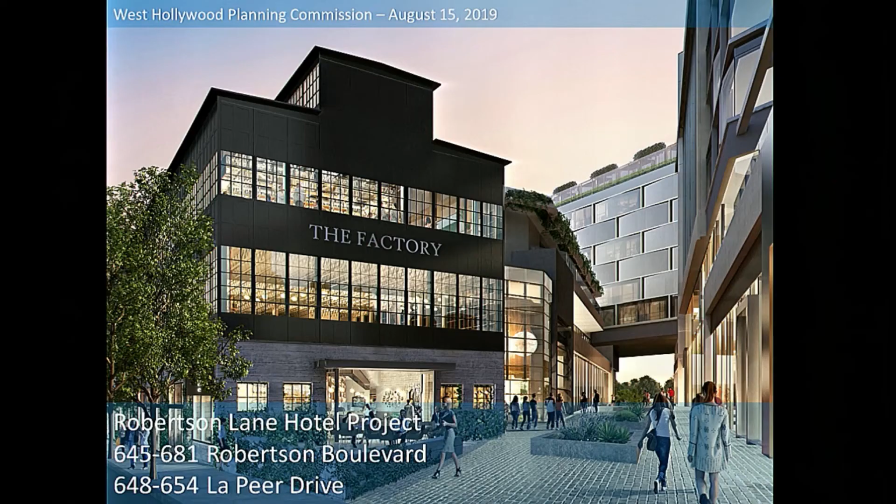Thank you. Good evening, commissioners and Chair Jones. Thank you for the kind words, appreciate it. This item, as you mentioned, is a request for changes to an approved project located at 645 Robertson Boulevard and 645 to 681 Robertson Boulevard and 648 to 654 La Peer Drive.

It's known as the Robertson Lane Project. The project was approved in June of last year, and it generally consisted of about 258,042 square feet of development overall, 241 hotel rooms, retail, restaurant, and design showroom areas associated with the hotel development, about 10,000 square feet of ballroom and meeting space broken up into 2 main meeting spaces and pre-function areas, a 2,500 square foot nightclub, and a maximum height of 9 stories and 113 feet for the tallest portions of the building.

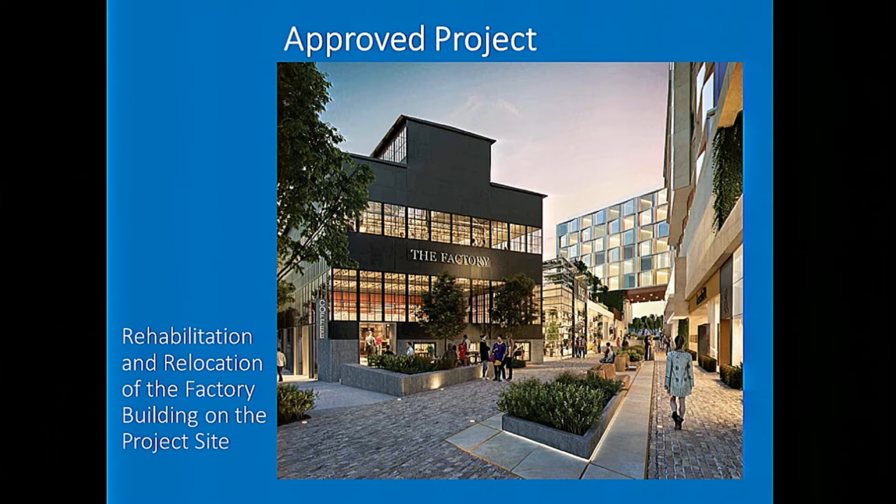Notably, the project also included the relocation and rehabilitation of portions of the factory building, which is a historic building located on the site. It's currently located spanning between Robertson and La Peer Drive, and it will be relocated along Robertson Boulevard. And finally, the approved project includes a pedestrian paseo through the project from Robertson to La Peer, known as the Robertson Lane.

Earlier this year, the applicant approached the city with some changes to the project. These generally included 4 fewer guest rooms, so now we're going down to 237. Slight reductions in overall square footage, the details of which are in the written staff report. I don't need to go through all the numbers here. Reconfiguration of some of the uses on site, notably the ballroom was moved to the Robertson side.

And the guest rooms that were behind the factory building were moved into the towers, which creates a lot of efficiencies for the guest rooms to all be located together and for the ballroom to be located in a space where it doesn't need as many structural columns and can be a larger, more useful ballroom and meeting space, which is what the city really needs in this area.

There was a substantial area increase in the factory building. Previously there were 7 out of 12 20-foot-long modules of the building being preserved and rehabilitated, now there will be 11 out of the 12, and it will be substantially longer along Robertson Boulevard. There were also revisions to the materials and methods of construction, which I'll get into in detail in a minute, and changes to the La Peer frontage and hotel entry, which I will also get into in detail.

So many of the requested changes, I'm going to start with the ones stemming from one particular change: the removal of 2 buildings on the site that were previously to remain. These were always part of the specific plan area, part of the project site and the FAR calculations and all of that. They were just to remain, and now they're going to remove these buildings.

They were evaluated in the EIR and also in the addendum as to their historical significance and found not to be eligible for listing. This opened up a lot of different opportunities for efficiency on the site. Starting underneath, now this area of the site can be excavated, which allows the subterranean parking areas to be expanded, so fewer levels need to be dug out, and it reduces, not substantially, but reduces the export and excavation out of the site.

In addition, this also means that the driveways can be relocated on the Robertson side to the north and south ends of the property. What this does is add to the pedestrian orientation of that stretch of Robertson, where there's no longer a driveway bisecting the factory building and bisecting the site. Now pedestrians can walk the entire length of the project without encountering vehicle intrusion.

In addition, this led to the ballroom changes. It led to a lot of other reconfigurations within the site that is detailed in the table in the written staff report, where it goes through the different square footages that have changed.

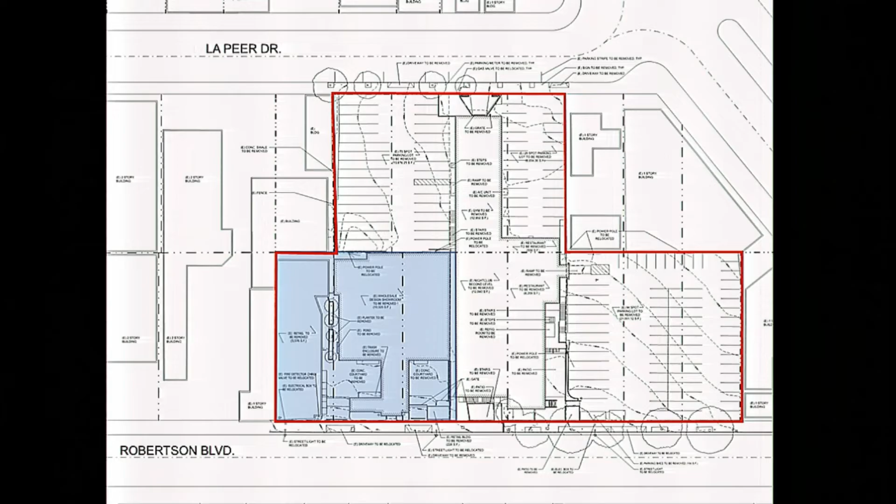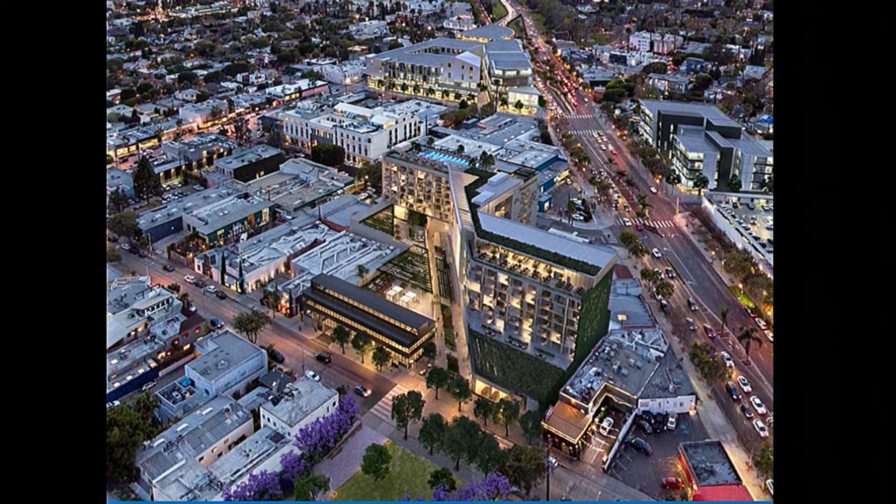So this is an image of the approved project, and you can see where the factory building is along Robertson, and the two white structures to the left of it are the building with the kind of rooftop ductwork. Those are the buildings that will be removed, and this is the new rendering of that same view. You can see that the factory building is substantially larger, and that the site is significantly more efficient. It makes a lot more sense this way.

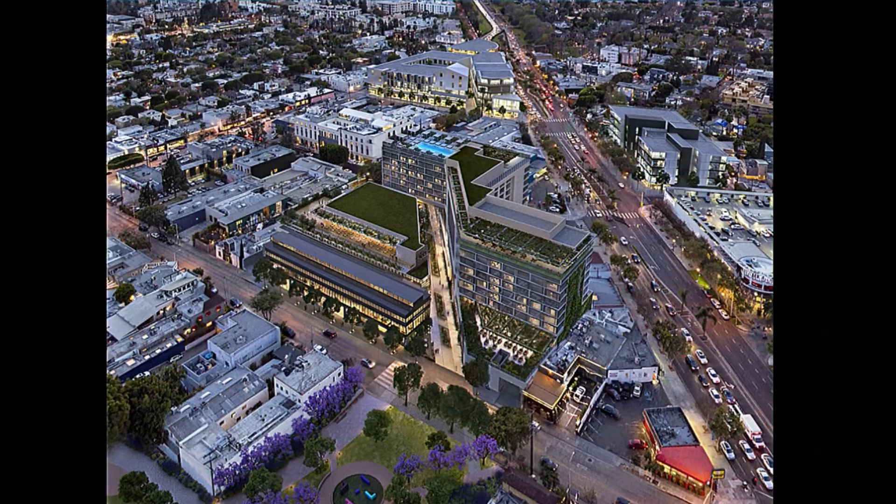So that was... one more view of the factory building and how much it is improved to not have that driveway through it and to be able to have a substantially added length.

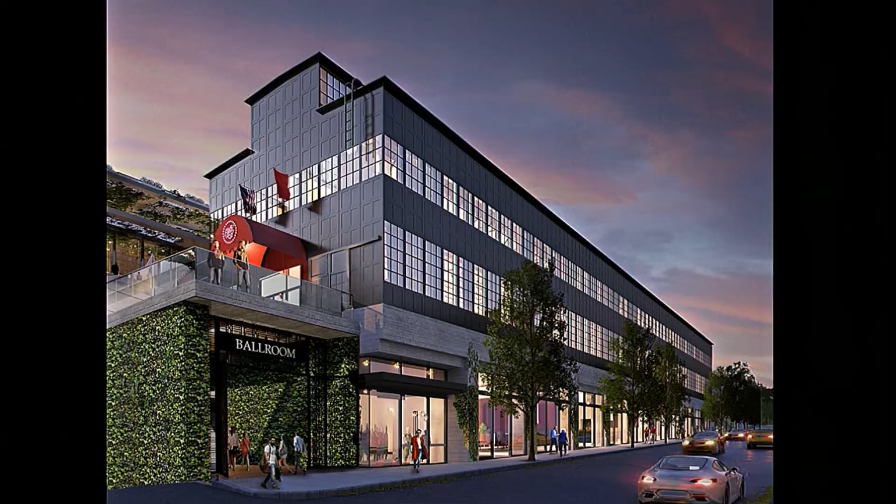So the next major change that was requested had to do with the skin of the building. In 2018, the approved design included a basket weave configuration on the main hotel facade using glass that canted at an angle. So this is in this portion of the hotel area. The materials were bronze anodized aluminum frames and limestone veneer, but a lot of glass.

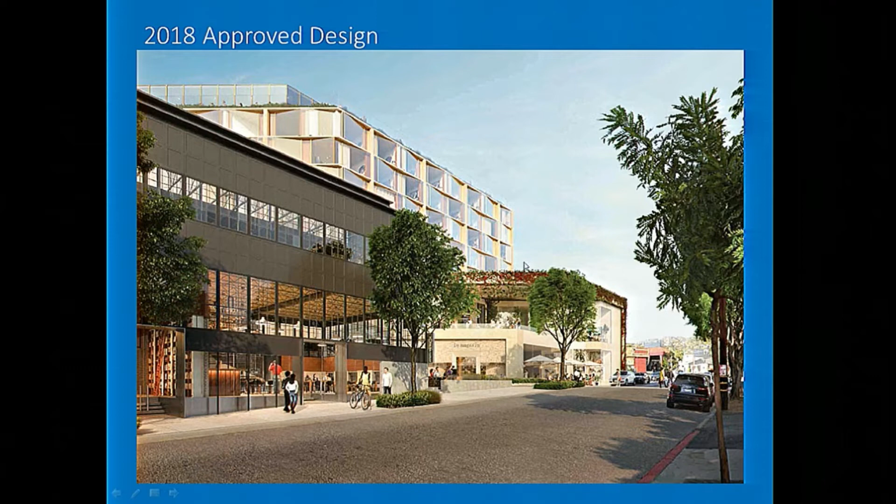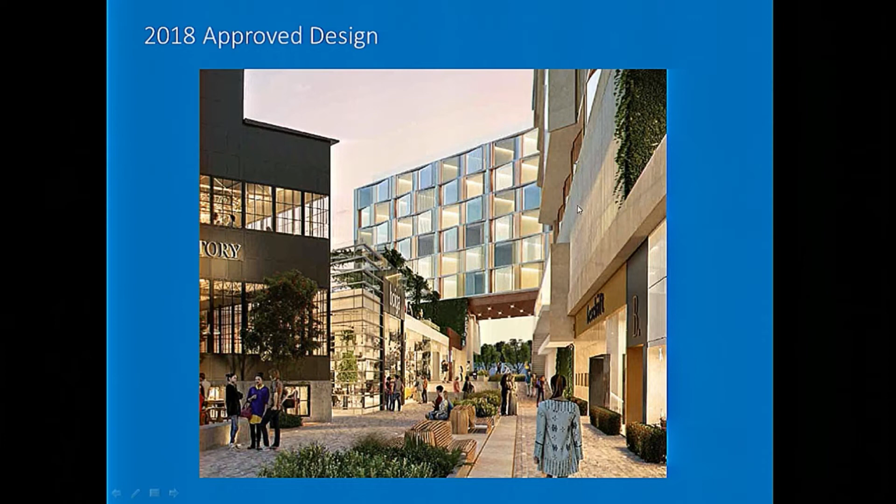And here's another view of the approved design from the lane, and this is the area I'm talking about. This was the concept that they came in with.

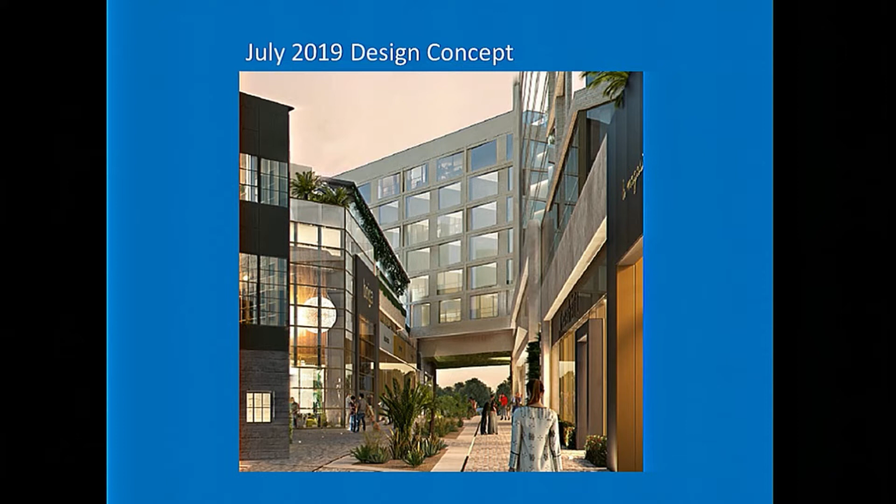Structural engineering issues came up as they got ready for plan check, and structural components needed to be added, so they ended up with a lot more solid space than there was to begin with. They treated that with more of the stone veneer, which is a nice material, but what it did was it ended up flattening the facade and significantly reducing the interest. It was harder to read the basket weave, and it wasn't reading with the same design intent.

As you know, the item was continued from July. One of the comments that came from the Design Review Subcommittee and from staff was that this piece needed to be worked out.

What they did was use that time to explore other design and construction methods, and they were able to come up with a curtain wall system that regains that basket weave approach. It reintroduces the lightness and the elegance to the facade, and really goes back to the original design intent that the skin conveyed originally in the approval.

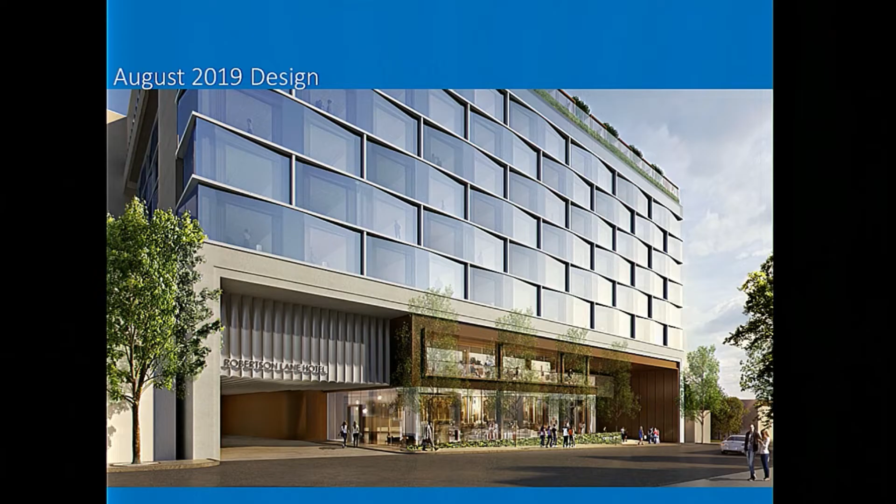So as the project was being engineered again, it became apparent that the span that was originally intended here would require some serious columns that would negate this open space, or substantial structural components across this span, which significantly lowered the height here, and the clear open height made a big difference in the entry to the lane.

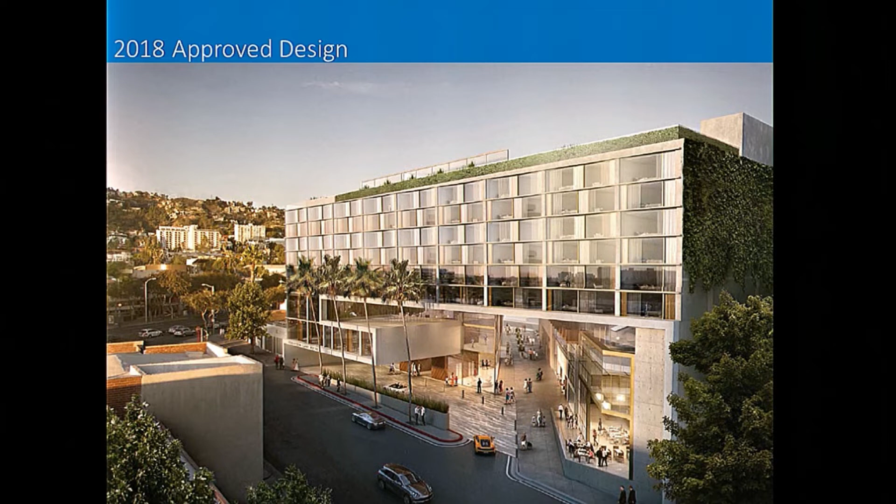This was another issue that Design Review Subcommittee and staff brought forward in the July version that we wanted them to work on. So what they were able to do in that interim was find a compromise position.

They're asking for a modification to the height, so they're asking to add 6 feet 6 inches to the height of that structure, which is within the 10% modification area. It's a 6% modification. That will account for the structural girder that needs to go across, so it's almost identical open height with all the structure and soffits and everything in there. This significantly regains what we needed in that openness here.

Similarly, they've added this piece back in here that's kind of a floating box. It sort of regains some of that design intent with the cantilever in the approved design. I think the biggest thing to say about the change on this side is that it's a lot more pedestrian friendly, because you don't have that vehicle intrusion through the site, you don't have the vehicle drop off here. You've got an entrance to the hotel right off the corner of the lane, an entrance to the lane, and then cars at either end, similar to the Robertson side. So you've got that transparency, and you've got the activity right on La Peer, where we prefer it.

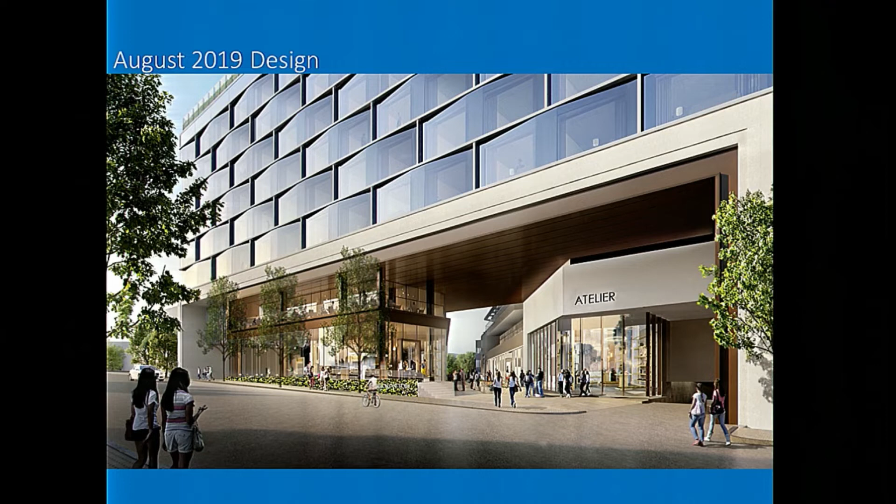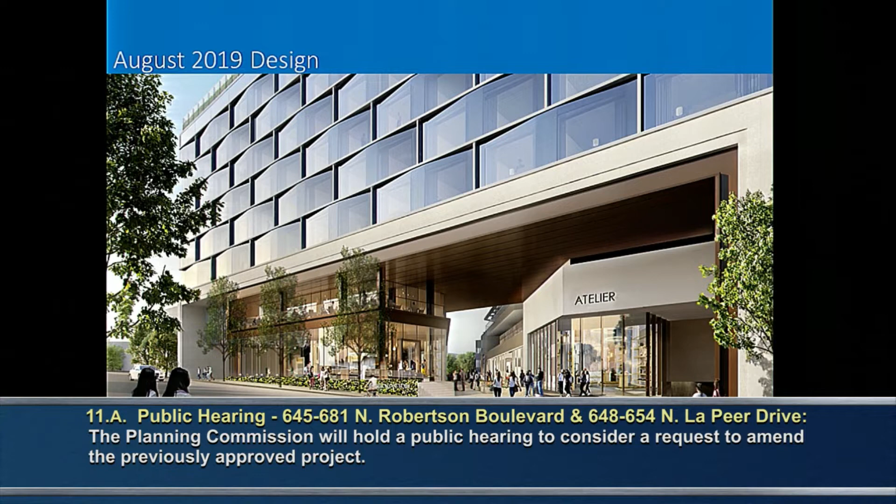I think it's on... no, I see what you're saying. I'm just looking, hang on one second. I will allow the applicant to talk about the logistics of how that circulation will work. As far as the bike racks, it looks like they are on the lane side of a wall there, so they would be separated from the outbound traffic.

I wasn't so much worried about the traffic as the people waiting for their cars and how much space there is for however many people are picking up cars. Given that this is now a 100% valet building, is that correct? I believe so. Okay, whereas the previous iteration it was not? This is something we can look into more. I think it's a good comment, and we'll look into it in the parking operations plan and circulation plan that comes during the plan check phase.

Sorry, I just can't find it right now. Okay, and back to that parking. So it is now 100% valet for 750 spaces. That's what's being proposed, yes. Okay, so do we have a commensurate parking plan as to how that would work?

So the parking operations plan is a condition that they have to prepare later. Okay, because I'm just worried about the logistics of how many people that involves. You've put 700 parking spaces in one level with all of the parking blocked by additional valet. So I'm wondering just how that's physically going to work. Okay.

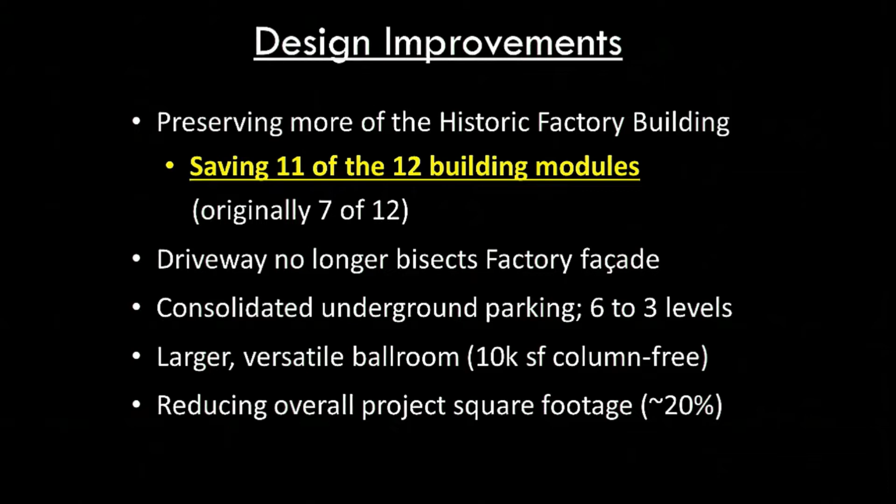As Jennifer explained, with some reorganization on the site, we've been able to improve an outstanding project. Notably, we're extending the restored and rehabilitated factory building to 11 of 12 modules. The driveway has been removed from the Robertson frontage of the factory building. We've consolidated the parking, we have a larger ballroom that will be the trophy for all of West Hollywood events, and we've reduced the overall project square footage. I will introduce the team here that's worked with Craig Hodgetts, our original project architect, and our folks at HKS who have helped us with the construction drawings to lead you through a comparison side by side of the approved and updated designs.

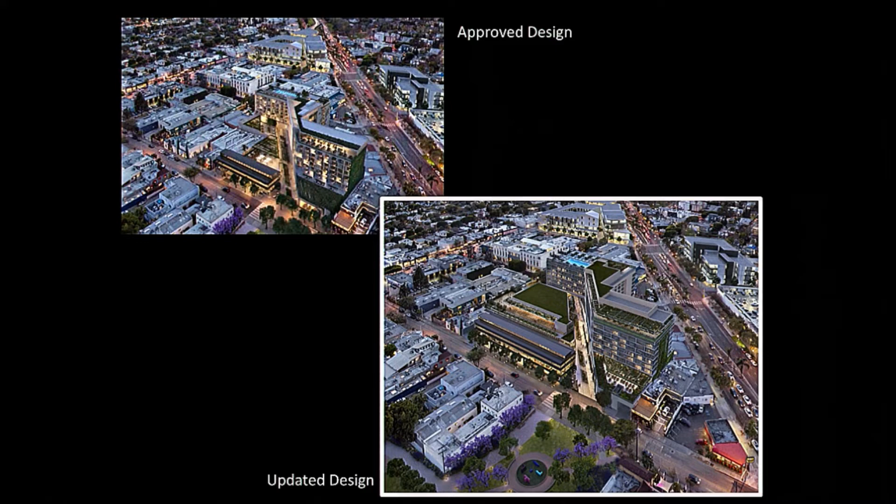This represents the before and after, essentially, of the lane itself, and some of the additional improvements to the lane that we've been able to solve is we've removed any steps in the lane, so now it's an even more pedestrian-friendly, accessible space for all the residents of West Hollywood.

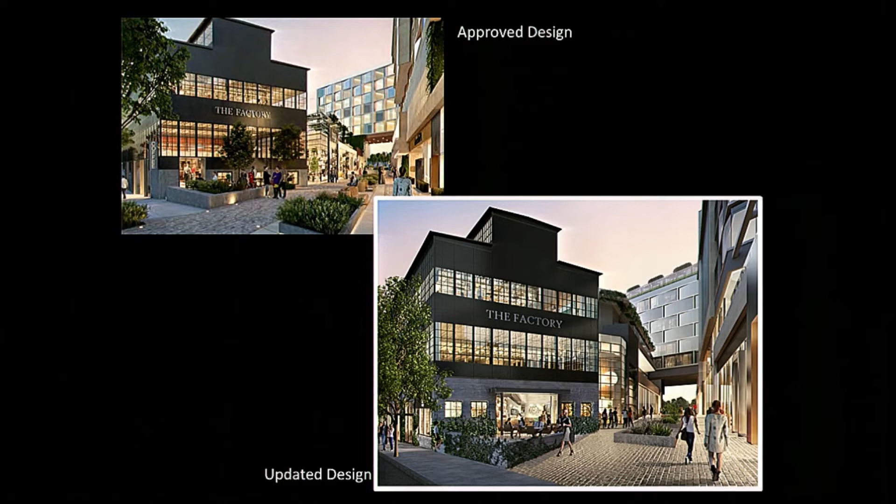Another closer view here, looking north on Robertson, you can see by relocating the ballroom, we've actually reduced the bulk and mass of the building on the northern end of the site, where the retail reaches northward towards Santa Monica Boulevard. And we've actually brought a restaurant space with a nice trellis that faces out onto Robertson Boulevard. So we feel this is another enhancement to the design.

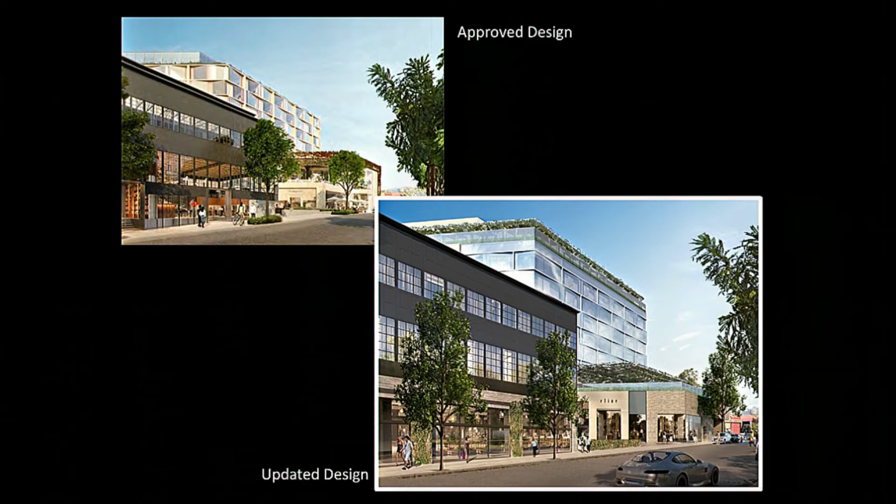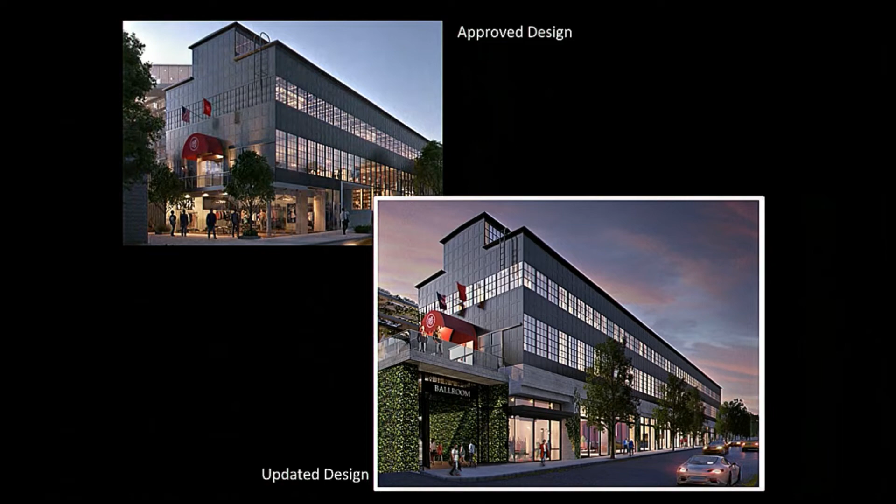As you look in the view, there's also a terrace that we've added over this ballroom entry, which is the commemoration space plaza, which has doors directly into the spaces we were discussing that are commemorating Studio One and the camera factory. So we think this is also going to create a better experience addressing some of the traffic issues, because then the ballroom is on Robertson where peak demand is. We can deal with the valet situation along the property and not have it all on La Peer.

This view also shows what was discussed about, we feel, the greatly enhanced pedestrian experience by removing a motor court along La Peer and creating a far more focused, pedestrian-friendly experience. There are some details that have been discussed about bicycle parking and separation of uses, and we feel we have a very strong plan to address all of that and make it work.

Might not be readily apparent in all of the renderings because there's a lot of details that go into making that work, with guardrails, et cetera, but we've done the analysis and feel very confident that it works.

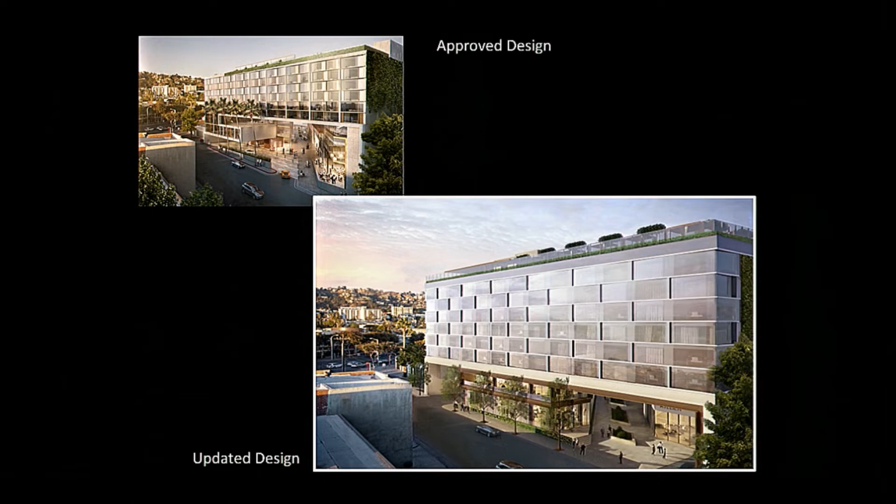Another detail here that we can look at highlights the retainage of the basket weave, and I have another view that'll show that in a little more detail, but I wanted to zoom in and focus on the enhanced public celebration of the hotel lobby, that it really fronts directly onto the lane, and you don't have, as the upper view shows, an automobile entering a motor court with pedestrians. We've completely separated the two, and we feel it's going to be a far more friendly, safe, welcoming, and celebratory experience for guests of the hotel and the public who are walking down the lane.

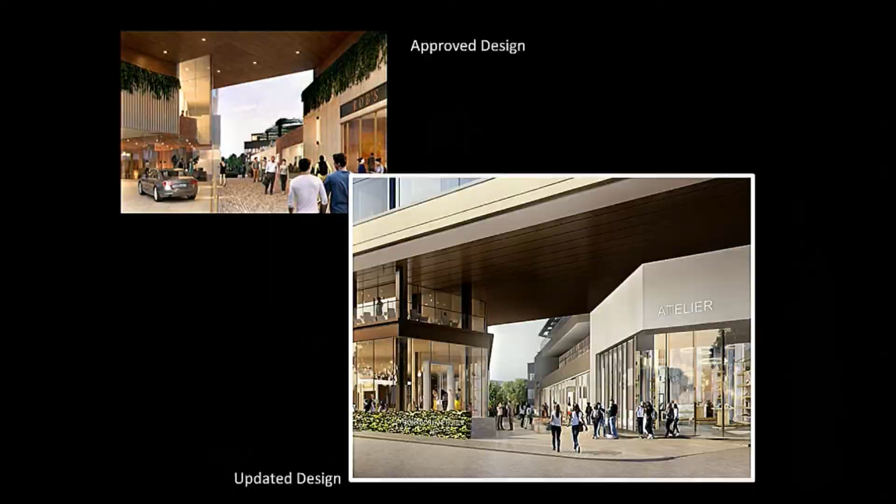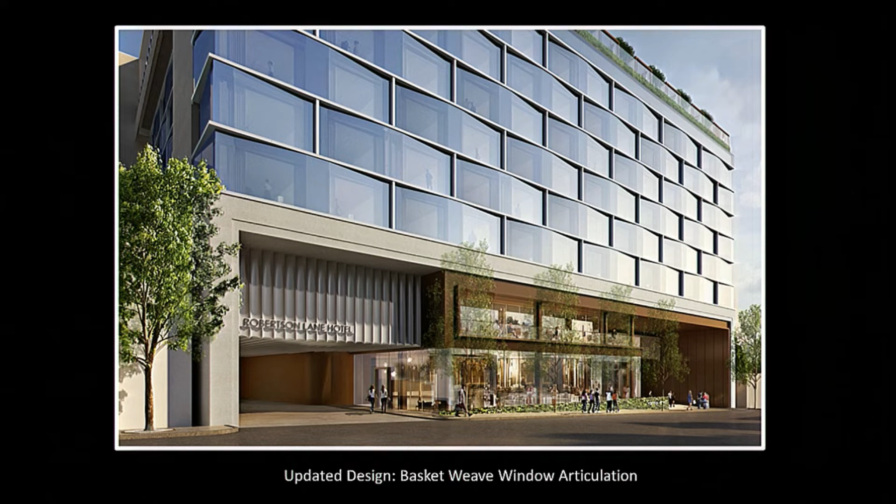This gives you a little bit more detail of the experience of that lobby and some of the cantilevered feelings of the motion that was described by Jen in her report to you. And you start to see a little more of the detail of the basket weave on the facade, then grounded with very beautiful limestone material. So it's a very high quality material on the exterior of the building. And we feel that the modulation of the facade really carries the spirit of the design and has a very contemporary, beautiful feel to it.

Another detail that wasn't really discussed in great length was the addition of, we've kind of wrapped the edges of the building with windows to lighten the mass along Santa Monica Boulevard, which is basically the end of the hotel, and an integration of a green wall element. We think this goes a long way towards modulating the mass, articulating it, and giving it visual interest. So we think this is a great improvement to the design as well.

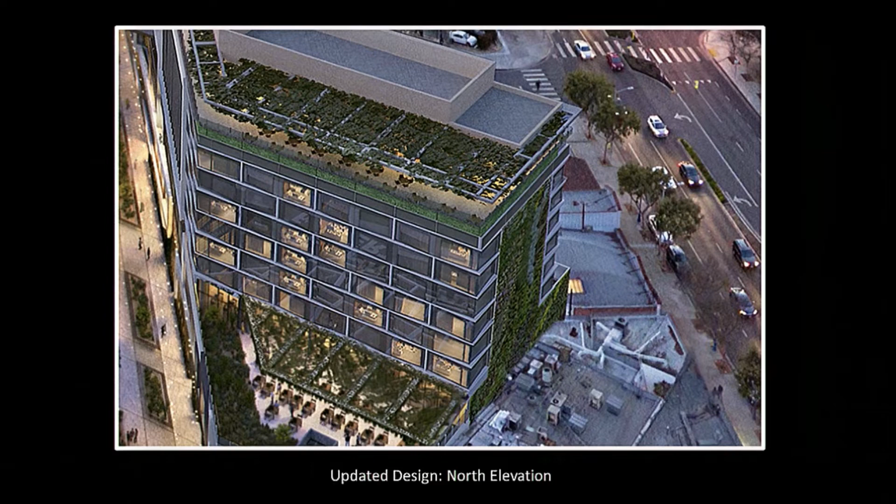Thank you, Commissioners. I'm Jim Arnone, Land Use Counsel to Faring. As a preliminary matter, I'd like to make clear that no hotel operator has been selected for this project. Faring did issue an RFP. It went widely to all luxury hotel operators. They've interviewed virtually everybody, and no hotel operator has yet been selected, so there isn't yet a flag.

I also wanted to comment on the question asked about the parking valet process. There will be multiple valet stations: one on the La Peer side, one on Robertson, and one down in the garage. Our project's traffic engineer studied this and confirmed that we'll be able to accomplish the drop-offs and pickups with just normal, typical wait times during rush periods. So we're very confident that the all-valet process will work.

Wanted to note that you have before you a very thorough EIR addendum. It's very lengthy, longer than you see for most EIR addendums, and it confirmed that just like the project you previously approved, this will continue to have no significant impacts that we haven't been able to mitigate to below the level of significance.

We appreciate your design review subcommittee's comments. I think you can see that there has been a lot of revisions. We took everything to heart. We got a lot of input, and we responded to it. We appreciate the Historic Preservation Commission's unanimous recommendation. We very much welcome and are grateful for the support from the historic preservation community. With that, we respectfully ask that you approve the staff recommendation and approve this project so that this exciting future landmark can get going. Thank you very much.

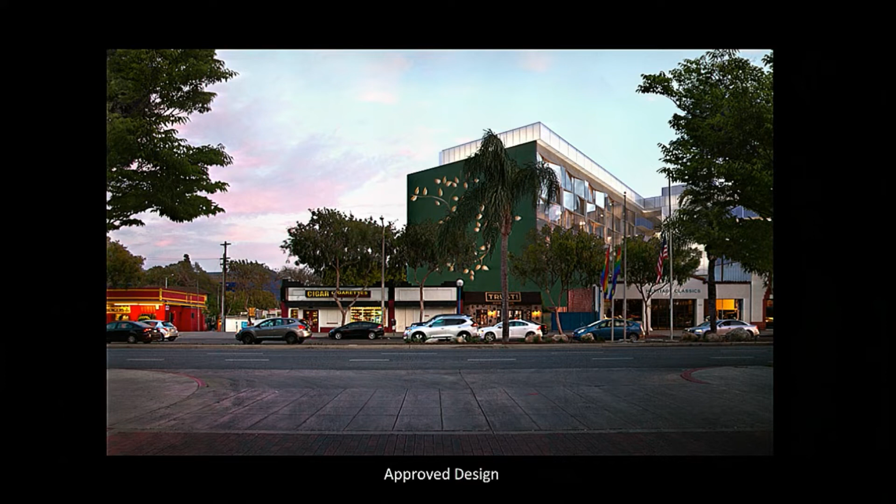Commissioner, I'm Jake Stevens, City of West Hollywood. This was a rendering that was provided for City Council at the special request of a council member, outside of the normal images we typically provide or are required to provide. Unfortunately, we weren't able to recreate these with drones and all of that at this point, so we do have a comparison of the approved design and the updated design of the north elevations here for you. If you have specific questions, we can have the architecture team refer to these two elevations, Commissioner. Yeah, I thank you, I saw the elevations, I was just looking for the renderings. You had renderings of everything else, but we don't have one for Santa Monica. That required extensive drone work that we did before.

That's it for now. Thank you, Commissioners. No other questions? All right, with that, we will move into public comment. How many speakers do we have, David? We have 18.

Generally speaking, public comment is limited to 3 or 2 minutes at the discretion of the Chair of the Planning Commission. Given the number of people who are here to speak tonight, I'd like to suggest that we give 2.5 minutes to each speaker as a happy medium. Again, if there's something you'd like to say, we always want to encourage public participation. We're incredibly grateful for your feedback and your time. We recognize that most of you have jobs just like us and that this is time out of your day. So we want and need you to be here in order to make a decision that we can feel good about for the community. That being said, you are also welcome to support staff's recommendation or oppose it by name.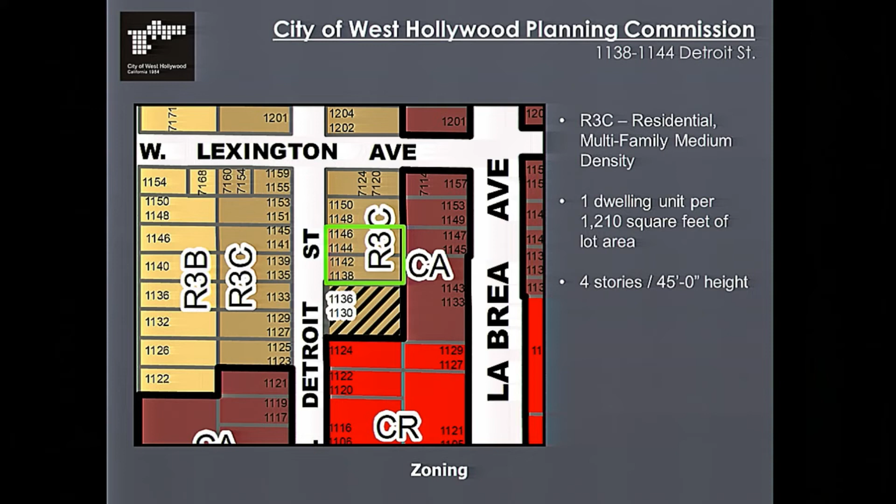So the project I'll be presenting is a 10-unit multifamily condominium project located at 1138 to 1144 Detroit Street. A little bit of background: the property is located in an R3C zone, which is medium density multifamily. It allows for one dwelling unit for every 1,210 square feet of lot area, and it allows for 4 stories and 45 feet in height.

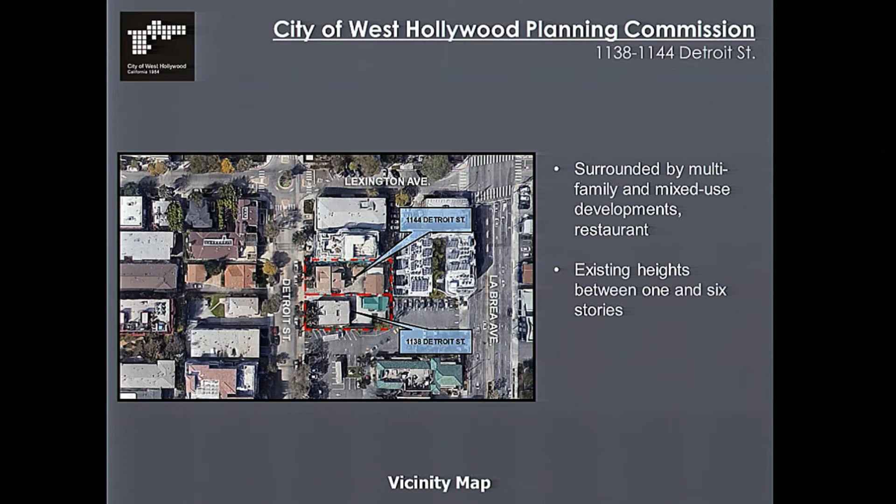Here's an overhead view of the surrounding neighborhood. Lexington to the north, Santa Monica to the south, La Brea to the east, and the property is on the east side of Detroit Street. It's surrounded by single-family, multifamily, as well as mixed use and a McDonald's restaurant. Existing heights are between 1 story and up to 6 stories along Santa Monica Boulevard.

Here you can see the 2 existing lots. They will eventually be merged together for the development. On 1138 Detroit, or actually technically on both lots, they're both developed currently with a duplex and a single-family residence. On 1138 Detroit, there is a detached shed. All of these buildings will be demolished or proposed to be demolished, and all of the buildings have been determined not to be historically significant.

Okay, sure, no problem.

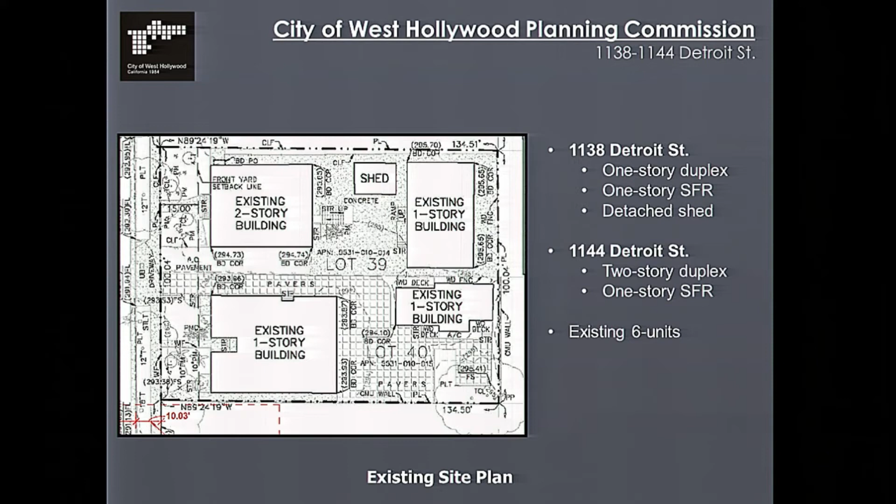The proposed project can be seen here. This is the front elevation, or I'm sorry, west elevation. The proposed project is 10-unit market rate condos. They will be paying the in-lieu fee for affordable housing, and there will be a total of 4 net new units. There are 6 existing, and they are building 10, so therefore 4 net new units. It will be 4 stories or 45 feet in height.

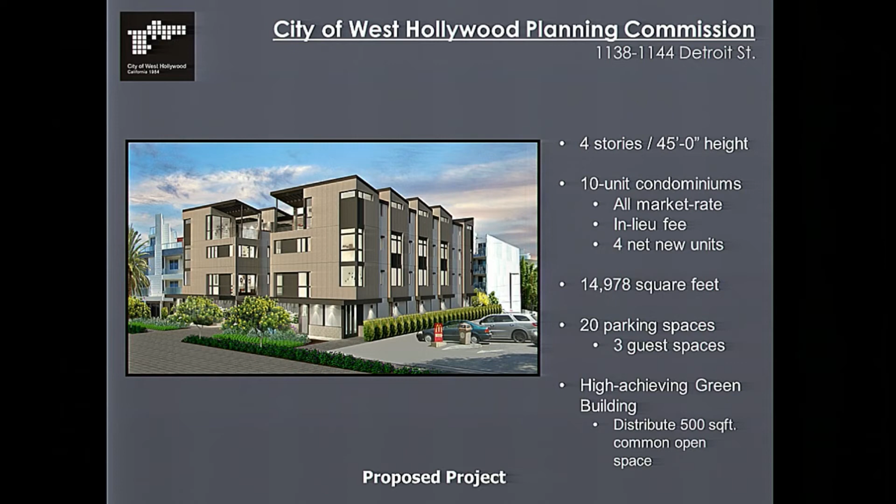They will provide 20 parking spaces for the residents, 2 per unit, as well as 3 guest parking spaces in the rear. It will be a high-achieving green building where they will be distributing 500 square feet of common open space, distributed to each of the 10 units.

On this next slide is the proposed site plan. The front setback is going to be 15 feet 5 inches, and the second floor and above will be set back an additional 6 feet. Side setbacks will be set back at 7 feet on both the north and south sides, and the rear will be 15 feet.

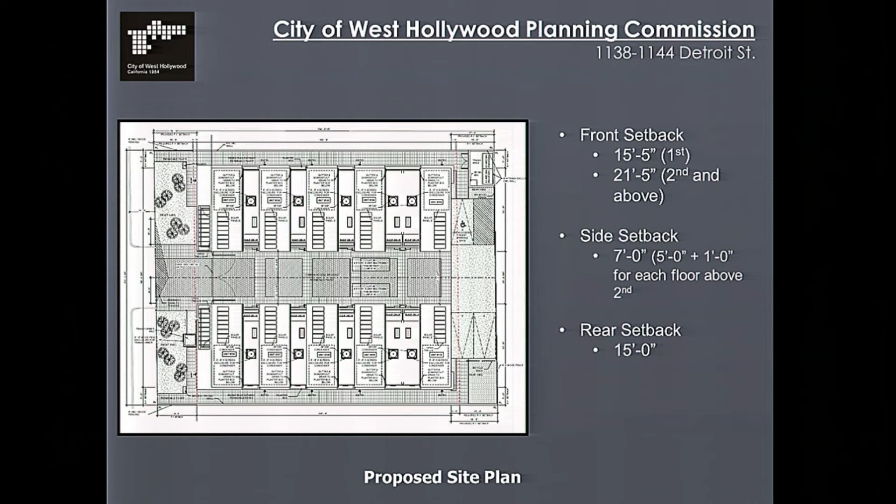The layout consists of 2 separate buildings with a common driveway in the middle, which lead to each of the garages as well as the guest parking spaces, and all the parking will be parked at grade.

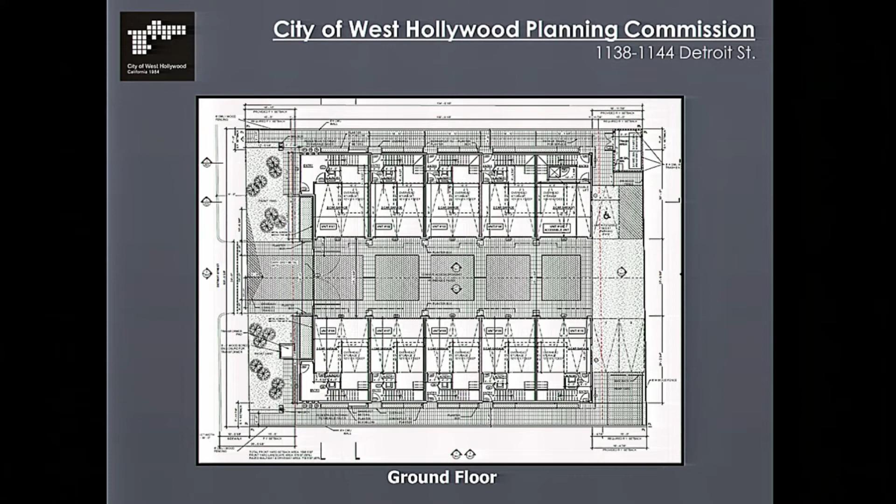The ground floor consists of the garages, so it's going to be a 2-car garage for each unit, as well as laundry facilities, overhead storage in each garage, as well as habitable space for the 2 front units, which are units 101 and 106. It'll have a private entry on the front as required by code. For each additional unit following, all their entrances are along the north and south setbacks.

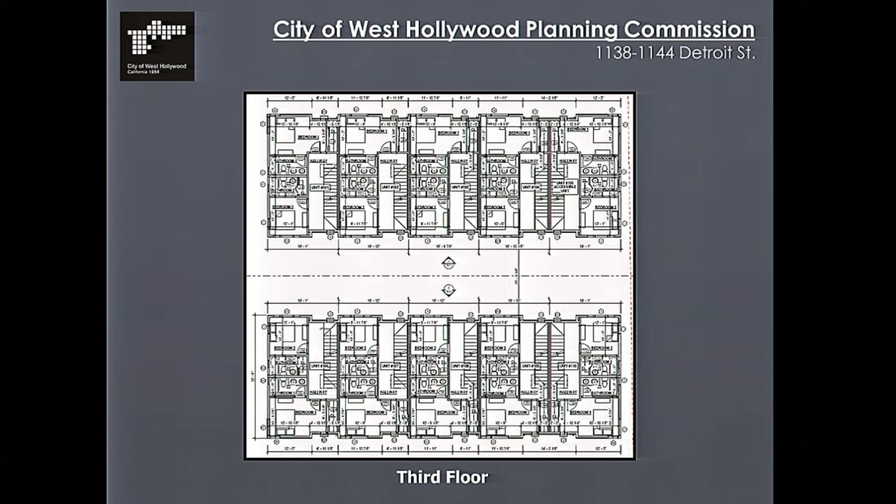On the second floor, these are basically the common spaces, kitchen, dining, living room, and both buildings essentially are mirror images of each other. So you'll have garages on the first floor, common space on the second, and on the third floor you'll have 2 bedrooms, each with 2 bathrooms. On the fourth floor, you'll have the master bedroom, master bathroom, as well as the roof deck.

On the roof plan, you can see there are condensing units. All mechanical equipment will be relocated on the rooftop and screened from public view. There will be solar panel locations on top, and it looks kind of weird, but the rectangular spaces you see are basically the open trellis, so you'll be able to see that on the renderings.

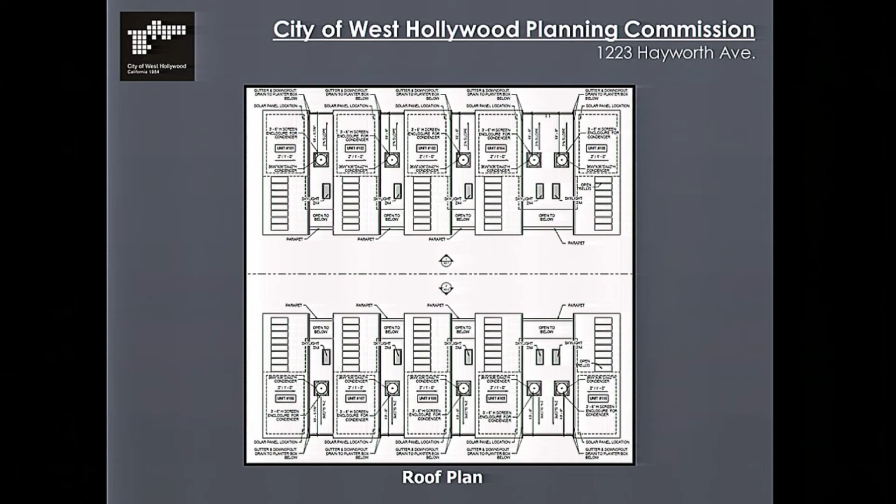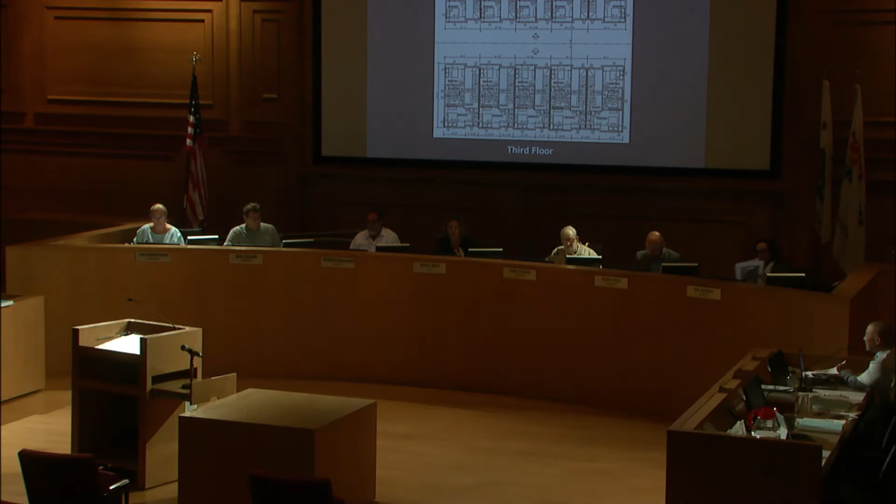Derek, I don't want to interrupt your presentation, but it's saying 1223 Hayworth Avenue. Oh, we are indeed looking at the rooftop plans for... sorry, yeah, that was a carryover. For Detroit, I fixed right? I'm sorry, yeah, it should be 1138, okay, 1144. I just want to make sure it's not transposed. Yeah, sorry about that. Oh, yeah, you're right, sorry, that's from my template.

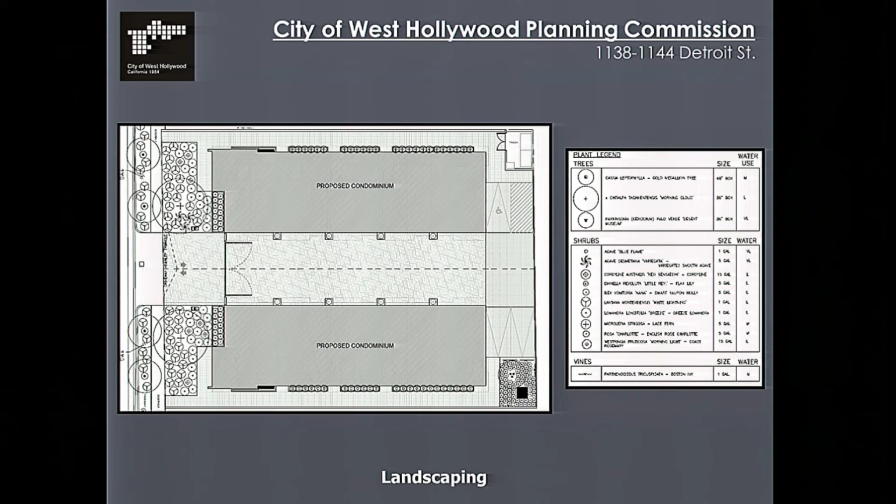Going further, as far as the landscape, the entire project will be landscaped. They'll provide permeability as well throughout the site, according to code. The applicant, or the architect, will be here and can go into more detail about that.

Here I'll be going through some of the renderings. Some of the key materials you'll find throughout each elevation include smooth stucco, fiber cement board, as well as black anodized aluminum windows.

Here you can see the front entrances to units 101 and 106, private entrances on the front, as well as habitable space. You can see the open trellises that I mentioned from the 4th floor, and here a good angle of those, as well as front yard paving.

Front yard paving will have a maximum of 41.5% on front. I think the rendering is a little misleading, but they will comply with the maximum amount of 45% pavable. They will have 41.5%.

Again, this is the front or side rendering. Here you can see separation of each unit vertically. You can also see the celebration of each entrance on the front as well as on the sides.

This is the proposed rear elevation. Here you can see the guest parking spaces. There will be 3 guest parking spaces, the trash enclosure, as well as bike parking.

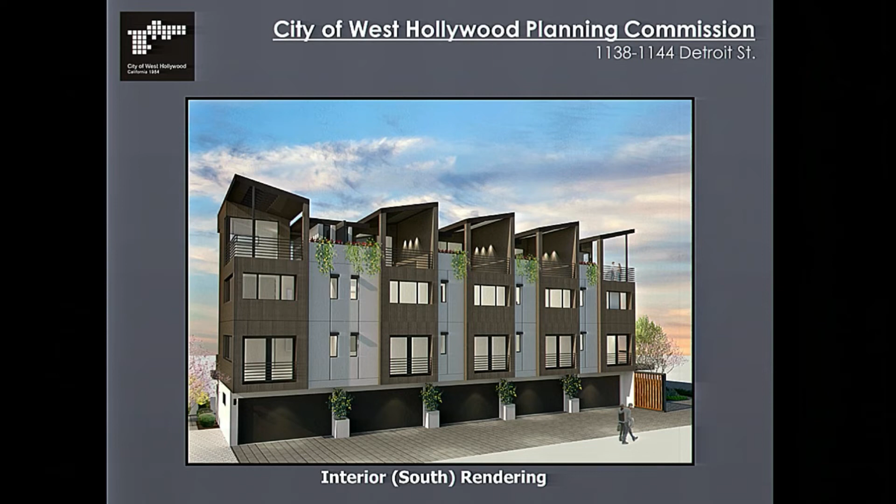They're vertically separated, with landscaping in between each unit, and roof decks on top. So in conclusion, the proposed project will provide a net of 4 new units, adding net new units to the city's housing stock and new development that's designed well. It incorporates sustainable design principles for high-achieving green building, and it complies with all the goals and provisions of the general plan and municipal code. So staff does recommend approval of the proposed project subject to the conditions of approval in the attached resolutions.

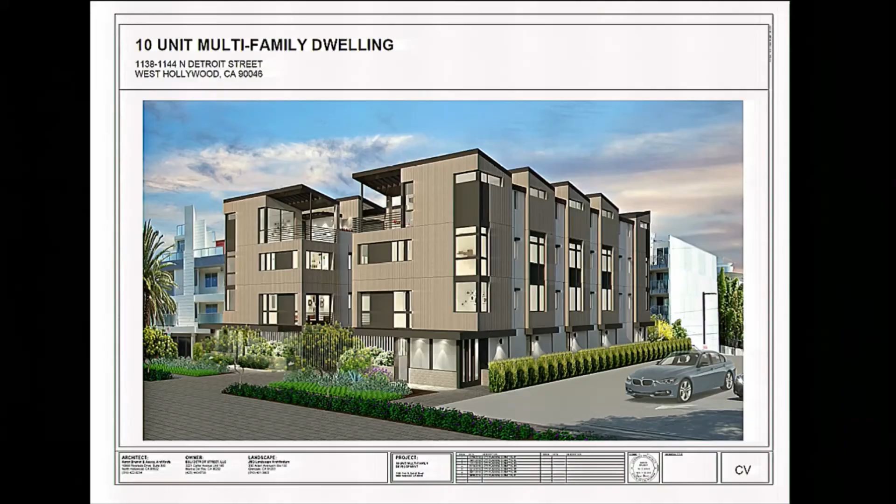I also wanted to introduce variation in the roof plane, so that's why you see angled roof versus flat roof, trying to establish that rhythm. And then at the entry side, trying to tie the two buildings together with a singular entry gate element, to develop that balance between it being a project as a whole and individual units.

The materials, the one thing I want to point out, and I've got a sample here in case you want to see it up close, is the fiber cement panels we're using on the facade, an Equitone product with vertical ribs so there'll be shadow lines. Again, I'm trying to break down the mass, make sure it doesn't appear to be like a monolithic element. It has shadows and a texture to it.

The landscape architect is here, so if you have specific landscape questions, I can cede the rest of my time to her. But other than that, that's really what I have to say about the design. I'm trying to keep it as simple and abstract as possible. I worked very closely with Derek, had many meetings with him where we refined the design quite a bit, and that's about it. Thank you.

Do we have any questions for the architect at this time? Commissioner Erickson? I'm going to let Commissioner Erickson go, then you. That's okay, well, you're next.

I don't know if the lot tie affidavit's been filed yet. I think the intent is that we're trying to get through this stage of it, and then once we submit for plan check and so on, that's when we're going to take care of that. But I don't know, I apologize. Can staff comment on that? We have the lot tie application, but it has not been processed yet.

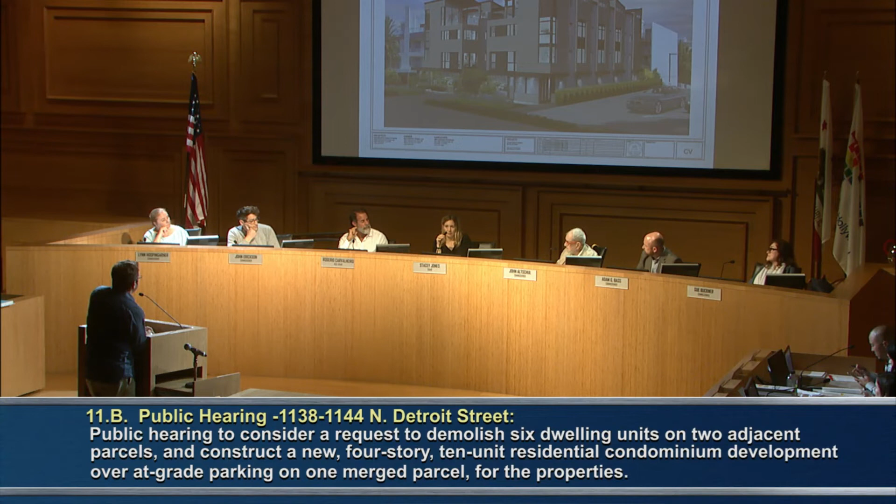Thank you. Again, I just want to make a note for the public record and for my fellow commissioners: we really try not to move into any kind of questions that might unfairly influence our decision later. I also recognize that you're kind of on your own tonight. So thank you. I think what I'd like to do is recommend that we move into public comment, unless anyone else has very specific questions about the project itself or its design. Thank you very much for being here this evening, and you'll have an opportunity to rebut after public comment. Thank you. I appreciate it.

We have, looks like, one public speaker, David, is that correct? Victor Omelczenko, where were you earlier? We were waiting for you. Just please state your name and city of residence.

Yes, Victor Omelczenko, longtime resident of the city of West Hollywood. And I did put in a position slip, thanks for noticing, Commissioner Bass. We just discussed a wonderful project that Faring's bringing back to our city, Robertson Lane and that, but I am very concerned about this project development here on Detroit Street. I really think at this point maybe it should be tabled for further discussion. I think there's a lot of unanswered questions. First, wearing my historic preservation hat, I hope you all had a chance to read the historic resource assessment that was included in your packet, done by a group called Kaplan Chen Kaplan. This was a historic resource assessment that found that the 1907 built building at 1144, that's the second building...